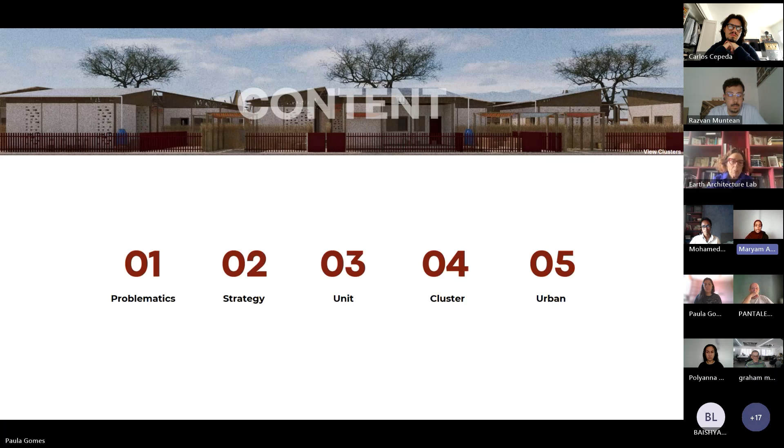We did some studies on IDPs in general. Today, one of the issues that's very prominent in any shelter strategy is isolation, density, vulnerability, as well as uniformity. This is a root cause that's existing within the world. And if we look at the numbers, Somalia falls in one of the countries with the top IDP numbers, showing it's a huge national crisis.

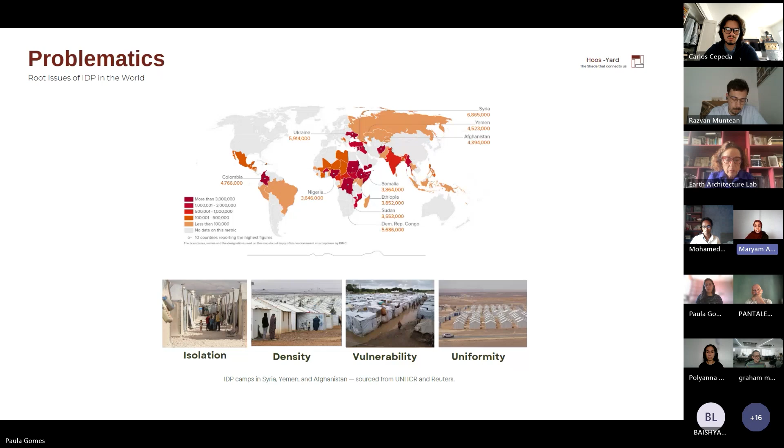So looking at that problem in general, we wanted to see how we can propose a solution that would address the architecture at large, as well as Somalia specifically. Yes, this is the context of Somalia.

If we look at the studies and materials gathered based on our scenarios, we have 3 different scenarios, 3 cities. One of the major problems was that the Somali IDPs are very independent. They do not integrate with their host cities, so the relationship is a little bit compromised. That's one area to look at.

Secondly, they're at a fragile state. These people had lives going on, but then disruption happened and everything stopped. The third part is lack of integration. They don't integrate easily, and that is because they think about when will they go back to their homes.

So one of the ways to tackle this would be, how can we make this area or this transitional phase somehow their home? And finally, the IDPs in Somali communities are mainly women and children. That tells us exactly the user we're dealing with—they're very fragile and they are on a building stage.

So if we look, these are pictures and references from the shelter cluster that was provided and exists. The disconnection is very prominent—they do not belong in any city. So they act as their own microcosm, their own neighborhood, and that draws a proper line between these IDP communities and the cities.

And of course, we have one major issue, which is instability. Any minute, they can be evicted because of land acquisitions and other problems. And finally, one problem that seriously exists is fear, especially for women, if they're about to use toilets, and just generally the environment is not the safest.

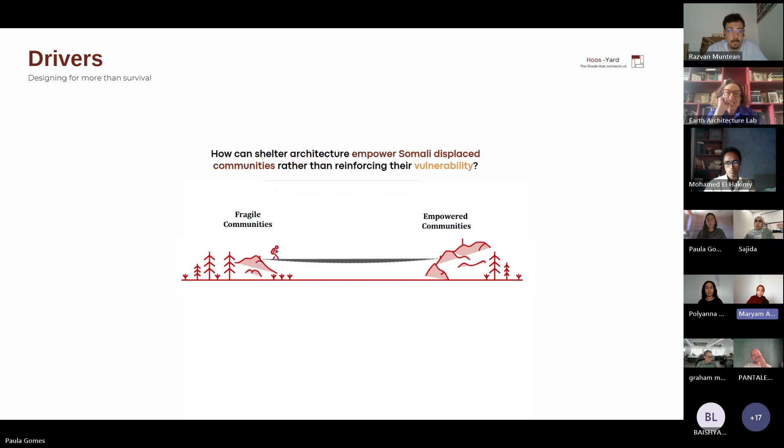One of the ways we can easily do that is establishing the core Somali values. If we look at any Somali value, any Somali society, there are very prominent values that exist within all the Somalis, whether they're based in Somalia or in the diaspora. One of those values is community—they're very social.

Secondly is identity—they really hold and respect their culture and traditions wherever they are. And thirdly, it's resilience. They do not hold back and they don't stop; they always find ways to keep it moving.

Every core value has been highlighted within the IDP camps. For example, we see reference of communities gathering under a tree in one of the IDP sites. And another one is identity—this is actually a wedding hall within the IDP camps.

And these are Somali patterns and Somali traditional clothing fabric. And finally is the resilience, where they are very much economically spirited, so they know how to start their shop fronts and build from the ground.

So when we started approaching the design, we wanted to see how we can bring beauty into these everyday spaces, because we're designing a home, a shelter. One of the elements that exist within any Somali neighborhood, Somali street, or Somali household is, number one, a very strong identity, strong use of colors, traditional patterns, motifs, paintings and pottery. So we wanted to see how we can extend the normal neighborhoods within Somalia to the shelters or the IDP camps. That started with identifying the spaces, starting with identity in space. How can we take it with us?

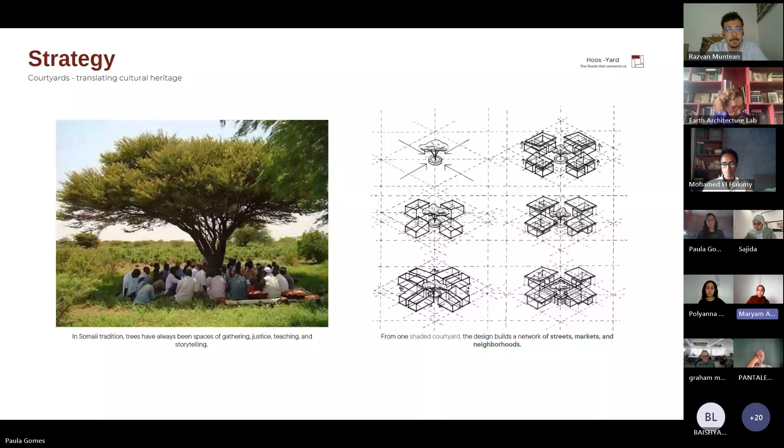If we look at our IDP housing strategy, it's about how we can create a settlement that starts from unity and then moves into a sustainable cluster and integrates seamlessly with the city. One way we did that was by creating a neighborhood with 4 families each and a central courtyard that builds trust, which they would need to function properly and get back on their feet. That allows us to have a sustainable cluster with fully integrated smart solution systems. And then from one micro unit, we extend into an entire micro neighborhood that easily could fit in with the existing host city.

Yes, so the courtyard isn't just used as a courtyard area, it has multi-purpose functions. First of all, it's a cultural space where things are happening, mothers and women are cooking, children are playing. It's a safe space for them, as well as acting as a climate buffer. We're dealing with harsh climate, different cities, for example Bosaso which requires a lot of heat, we have Doolow, we have Baidoa. So this also acts as a thermal strategy.

And finally, it's an economic enabler. There's a cultural Somali system based on group funding, called Ayuuto. So the more people know each other, the easier that can happen. It happens already in the IDPs, facilitated by NGOs, but this will allow them to integrate within their neighborhood, build trust in a way that they can start supporting each other, and create micro proper climate and micro economic areas that could finally bring them back to their feet.

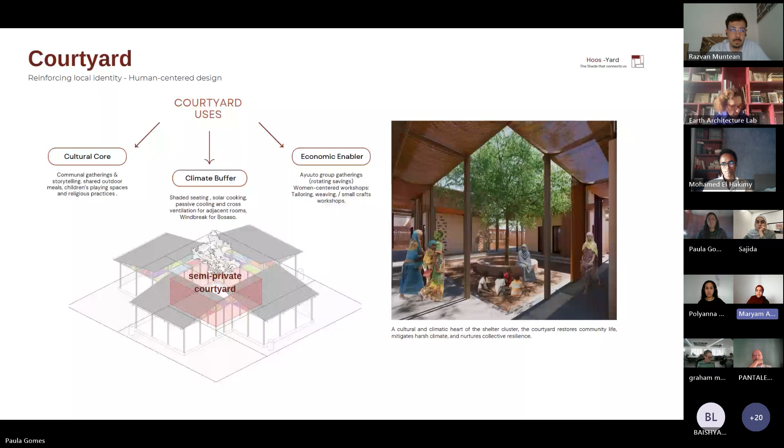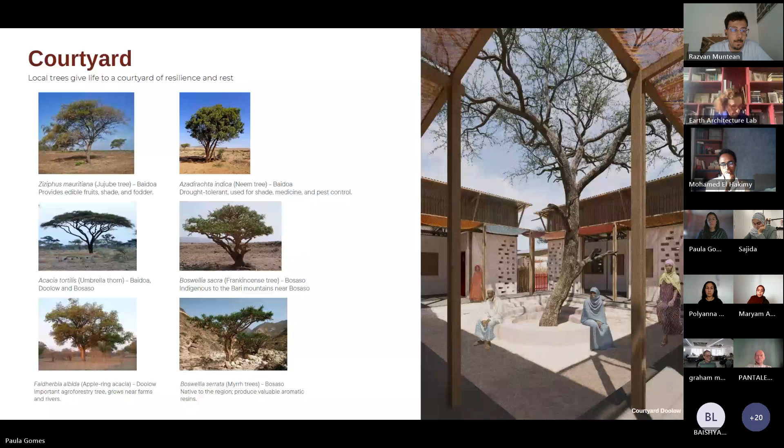Okay, so we begin the implementation of our concept with a general approach across all sites. All plots will share the same geometry and an approximate area of 110 square meters. Their placement is designed to allow the formation of the semi-private inner courtyard that my colleague talked about.

The core structure of the shelter will be a timber frame set on stone foundation with a single pitched roof of CGI sheets. This structural module will be replicated identically across all plots in all three sites, serving as our proposal solution for the emergency phase of the project. In this initial stage, residents will be able to install lightweight partitions, such as fabrics or CGI sheets, between these pillars to form their basic shelter.

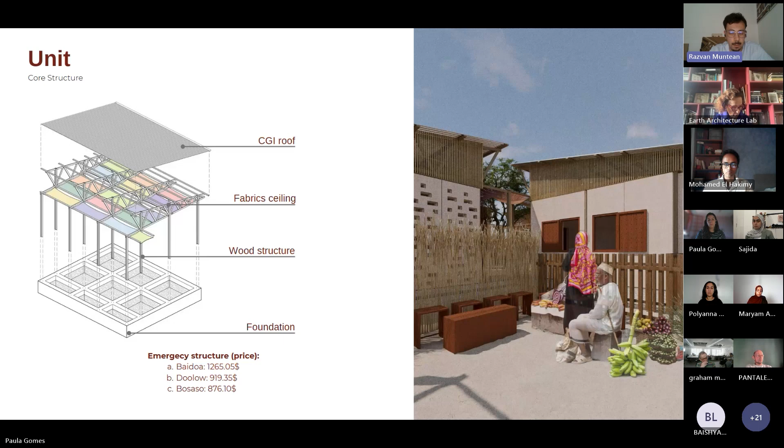We aim to give families the freedom to decide how they will use their plot and how they configure their living spaces. Our proposal offers a variety of wall types and a shading veranda system.

The walls are made of different materials depending on the site and are categorized into four types: solid wall, ventilation wall, window wall, and door wall.

Each family, within the allocated budget of their unit, will be able to obtain approximately 10 to 14 wall panels and 3 to 6 verandas. We need two walls every time to infill a space between two pillars, so each wall has a width of 1.20 meters.

This approach ensures that the main shelter structure remains robust, consistent, and professionally built, while the infill walls are left to the discretion of the residents, integrated with the help of YOM. This strategy introduces architectural diversity and allows each plot to gain its own identity and character.

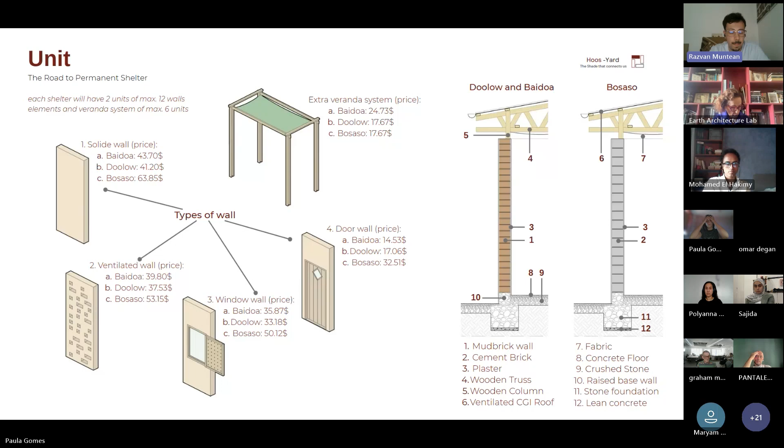As previously mentioned, the rigid timber structure represents the emergency phase of the project. Once the wall panels are added, we transition to the permanent phase. In the future, we also anticipate possible extensions, which will be presented later.

Below, we showcase our proposed wall layout options. All configurations include two rooms and a total interior area of around 21 square meters. Each family can choose its favorite layout. On the right-hand side rendering, we see an example of a permanent shelter built in Bosaso.

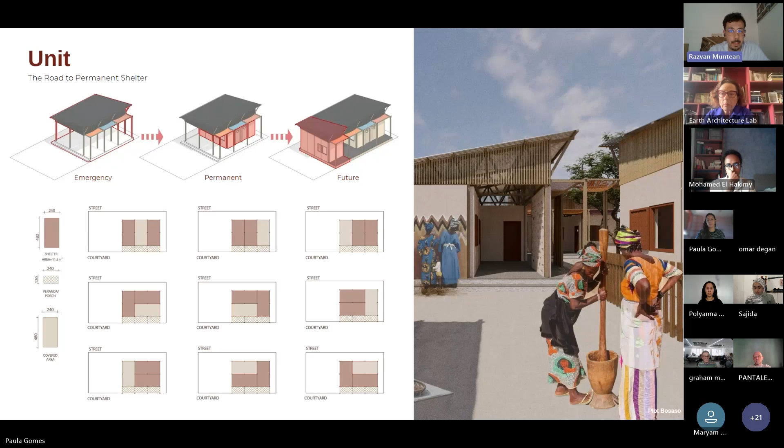In order to ensure sustainable design, we began by analyzing the natural environment in which the project is located, and we looked for solutions specific to on-site conditions. In addition to rainwater harvesting from the roof, we also propose a system of harvesting water from atmospheric humidity. This strategy was identified as particularly relevant in Bosaso, where rainwater is almost entirely absent throughout the year.

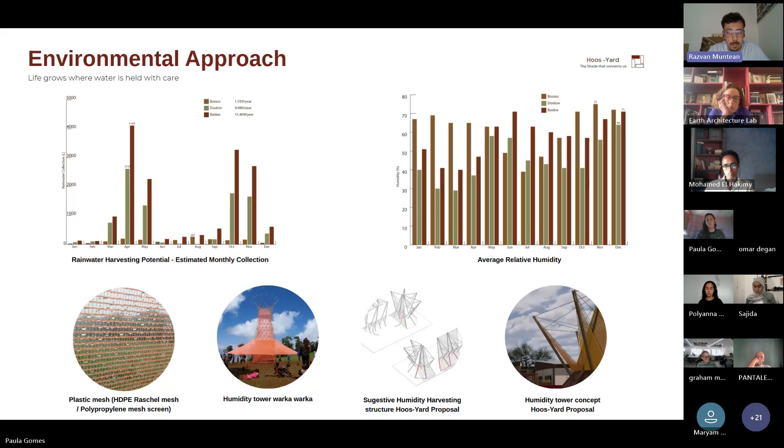Humidity harvesting systems are commonly used in coastal regions, and several studies confirm their effectiveness in arid climates. Also in Yemen, we have such systems, and we recommend that future feasibility studies can be conducted to evaluate and implement such systems at scale.

Our proposal is self-sufficient, designed to support an economically sustainable lifestyle. The large roof surface we propose significantly increases the amount of rainwater that can be harvested throughout the year. For example, in Doolow, a single shelter can collect up to 15,000 liters of water annually. The roof also enhances natural ventilation inside the dwelling and partially protects the walls from sun.

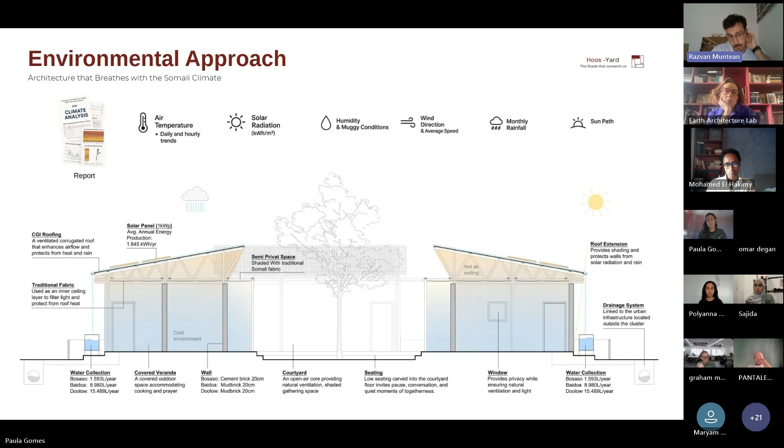Beneath the wooden trusses, we hang fabrics for thermal comfort. By elevating the roof highest at the center, we create shade areas in this semi-private interior yard. Each cluster includes a tree, which contributes to air quality and thermal comfort. Moreover, the urban layout allows future integration of shelters into public water and sanitation systems, ensuring long-term adaptability and resilience.

Like we mentioned before, we are creating a cluster system of at least 4 shelters centered around a courtyard and a tree, as Hasban mentioned. The idea of creating this cluster system is also to foster a sense of community between families that might never have lived close to each other or even know each other. This spreads from the smallest scale, the shelter, into the urban scale, as we're going to see next. As families move to these sites, not necessarily from an existing community, we can create this community within each site.

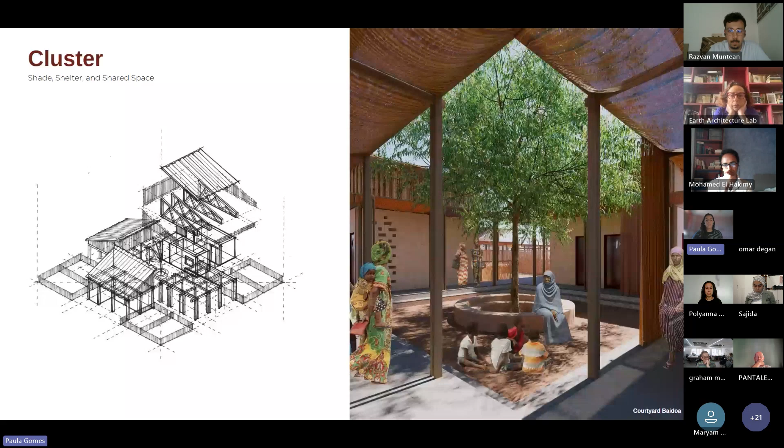Moving to Baidoa, we have seen that each city has a different scenario for how families are living and their livelihood activities. Baidoa is a farming and livestock community.

Is missing something here, sorry.

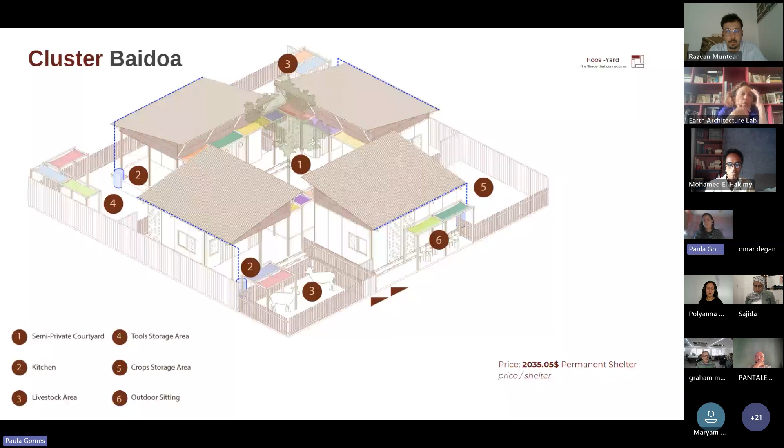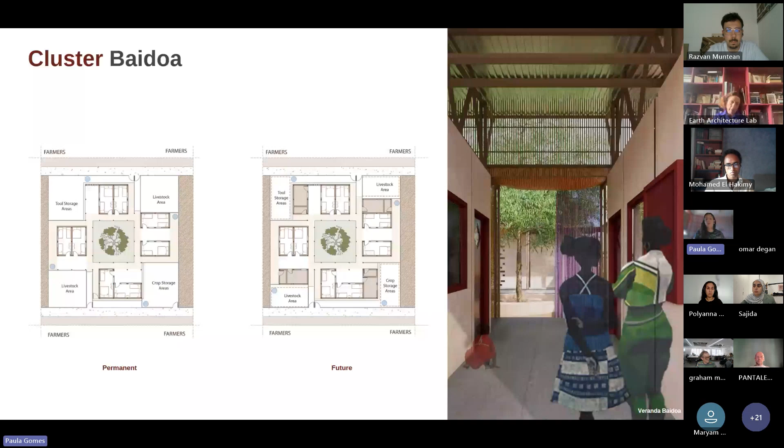Baidoa is mostly a rural site composed of pastoralist communities, so at the cluster scale we focus on having outdoor empty areas for each family to raise their livestock, be it sheep, goats, or a crop storage area. As mentioned before, we have a permanent shelter composed of two shelters plus one veranda, which in the future can be expanded by adding a new unit where a toilet can also be located. But we're still keeping these areas outdoors for livestock, workshops, or anything that fits into their livelihood activities.

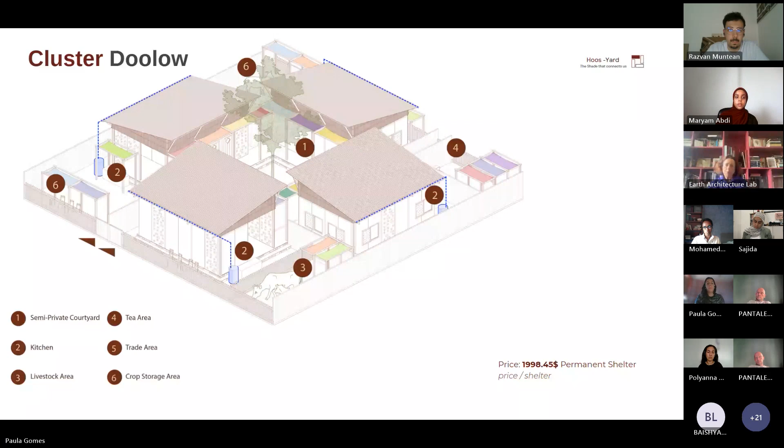For Doolow, we have a mostly farming community. They need spaces to do their livelihood activities, so we are thinking of having small yards within the cluster, but also giving them bigger livelihood areas at the urban scale. The same applies to the plans: we have crop storage areas, tea shops, and trade areas, since these farming communities would also have produce they might want to sell to neighbors who produce something different. And again, we imagine a future expansion to have another shelter unit with toilets included.

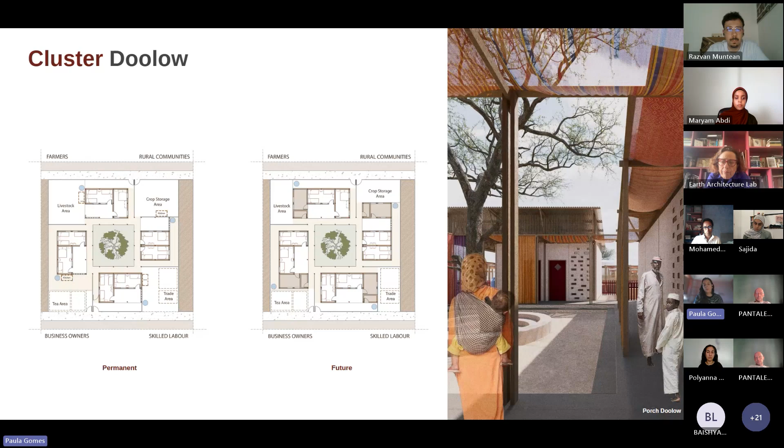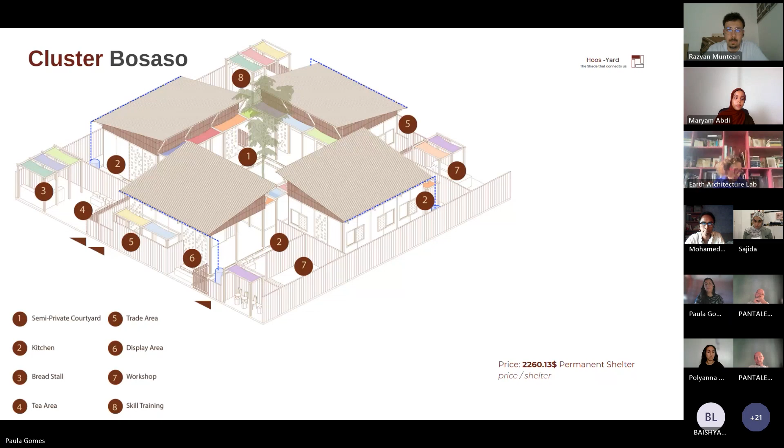Bosaso is the most different in terms of community and livelihood activities. The area has the harshest climate, so they're not very prone to farming or livestock; they mostly work with markets, shops, and informal trade. So we tried to create shaded spaces with our veranda system where in the future they could have shops, tea shops, coffee shops, and bread stalls — things that create a sense of community while giving them a livelihood and power to run their shops within their own cluster and plot. These plots are usually occupied through trades, workshops, and skill training areas where they can work with neighbors and build community.

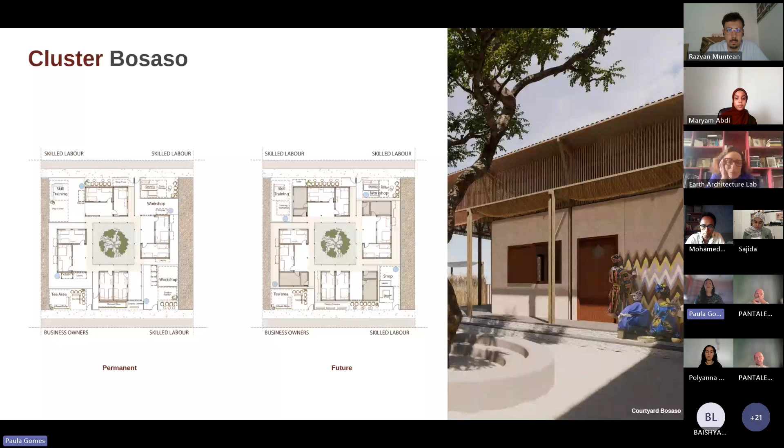An extension area is still included in every plot for the future. Within the cluster system, we've identified the potential of creating a toilet area with separated women's and men's sections. As mentioned before, to reduce the fear women feel using latrines in existing IDP sites, we try to create a more lively space by having these toilets always facing local or main streets, with clear gender separation. In the future, we see the potential for the toilets to move into the plot itself, so this area could be further developed into a new public space. We plan to use the same type of structure for these toilet units as for the shelters, so they're easy to build but kept separate from the existing shelters within the cluster.

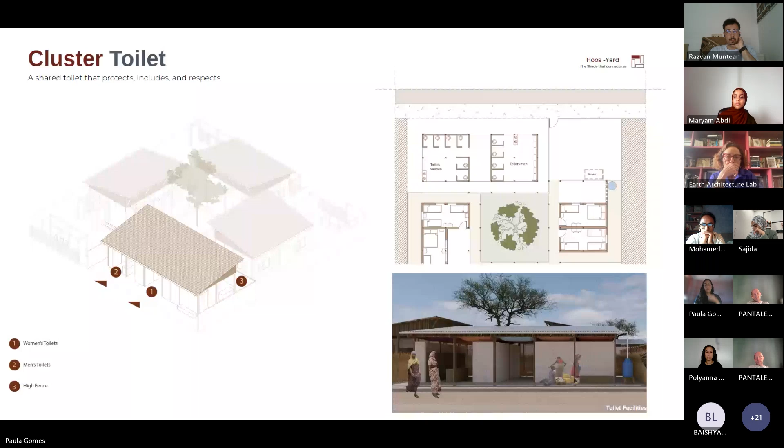Looking to the future and how we can grow urbanly, our cluster system moves easily from the urban scale. We've identified the potential for our system to be adaptable to different IDP scenarios, not only in Somalia but elsewhere, because it allows for easy growth and expansion and can be adapted to different morphological sites.

So looking more at the urban scale and approach, we've established some ground rules for how we develop each site. First, we have an urban infrastructure with bigger main roads at least 6 meters wide and local roads at least 3 meters wide, to allow cars and emergency vehicles to move through the site and to create evacuation routes for the entire site.

We created different sizes of clusters, not necessarily only a 4-plot cluster. We can have 6, 8 clusters or different shapes of courtyards depending on the needs of the communities and how the presented site is. We have one toilet cluster placed no more than 15 meters away from every plot.

And we created public areas and public facilities within every site given, every scenario, because we've identified that some have lacking public facilities around, or we've also identified livelihood activities that need bigger areas to exist, or how they also gather to the community and foster the sense of community at different scales.

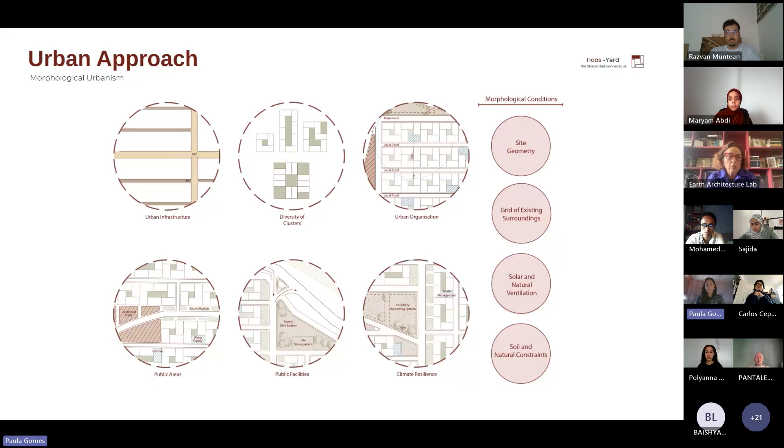So now we're going to look specifically through each site, starting with Baidoa, a pastoralist community of about 140 households. Following our clusters, we are getting to 140 plots within the site, having the water facilities, the courtyards placed, the common spaces.

So Baidoa is an area where there are more public spaces and facilities around, like a mosque, a school. They already have a borehole in the area.

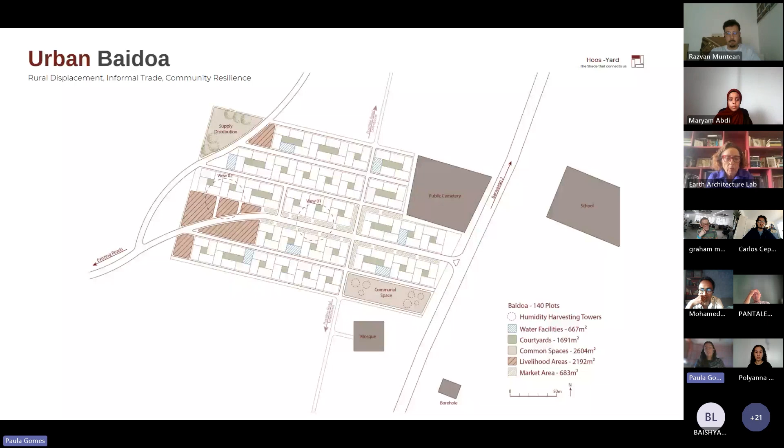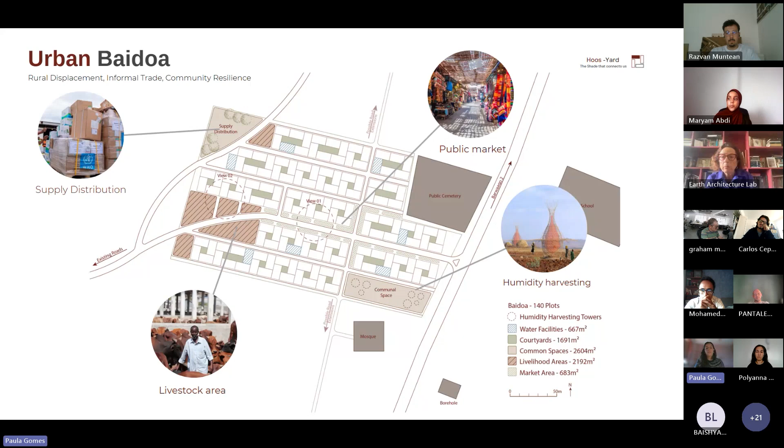So in the case of Baidoa, the livelihood areas are mainly focused on livestock, and also having the humidity harvesting and the common areas. So here we have 2 images of how we imagine these common areas could be explored.

On the left, we have the street markets, kind of like the souks, which is one of our references, and where the women and the families around can create these shop areas and the livelihood areas as well on the right.

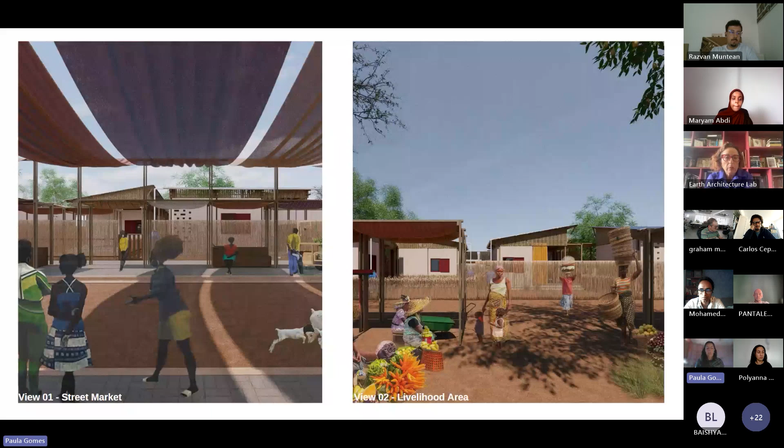And now we have Doolow, which has a unique characteristic, like Maria mentioned before, because tenancy of the plots is not that long. So the 2 plots down on the left have a shorter tenancy.

So for that, we try to place most of the plots on the right-hand side. We have about 165 plots in that area, and on the lower one on the left, we have 42 plots, which totals to 207 plots, 7 more than what is asked in the scenario.

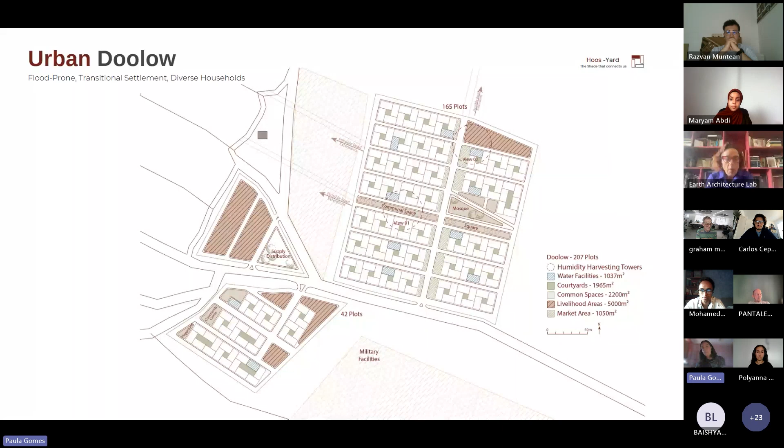We also have the communal spaces and the livelihood areas around it. And we try to place especially the farming area on the left in the plot that has a shorter tenancy.

This area doesn't have a mosque around, so we placed one around our site. And we try to implement these public facilities and activities to also foster the sense of community.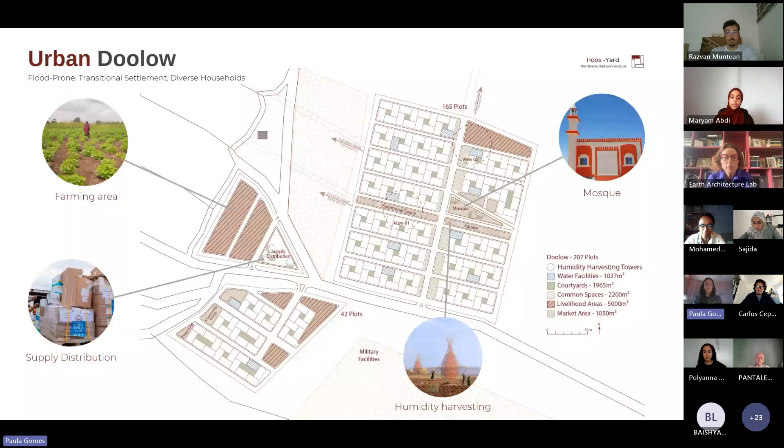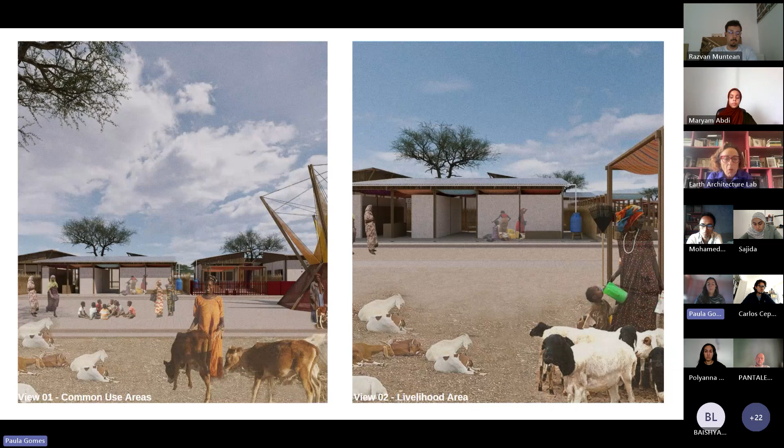And lastly, we have Bosaso. Bosaso is a city with the harshest climate, with really strong winds. So we try to place on the areas around the plot, especially on the sides, these public activities that could create a barrier for the shelters and households from this harsh climate.

So also this one is a city that doesn't have much livelihood around farming, so we have the strongest market area, and Bosaso is also in the expansion area of the city, so there are not many public facilities around.

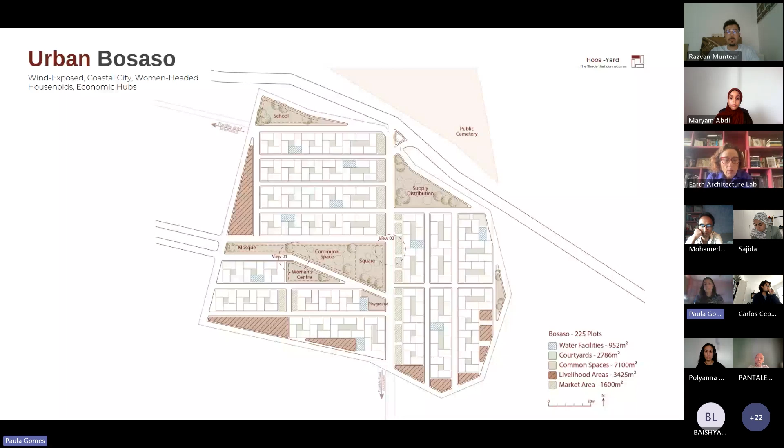So we've included a mosque, communal space, women's center, school, all these ideas that could be implemented on the site. And we are also meeting the requirement of the 225 plots.

Like I mentioned, the supply distribution. We also try to keep the supply distribution area always close to the entrance of the site, so it will be easy for them to bring maintenance and anything that the site might need.

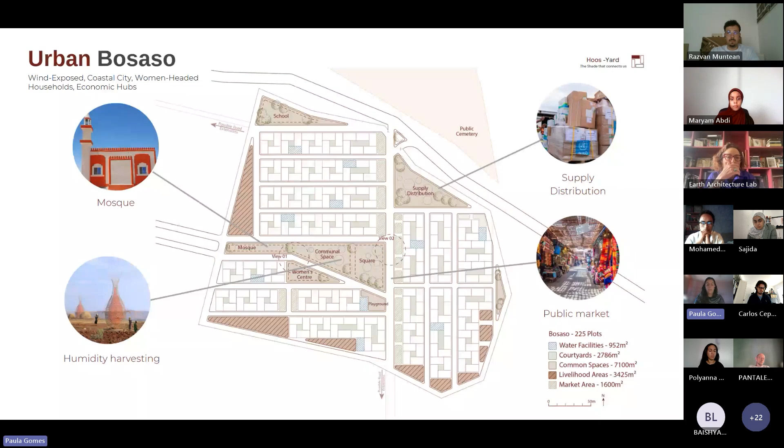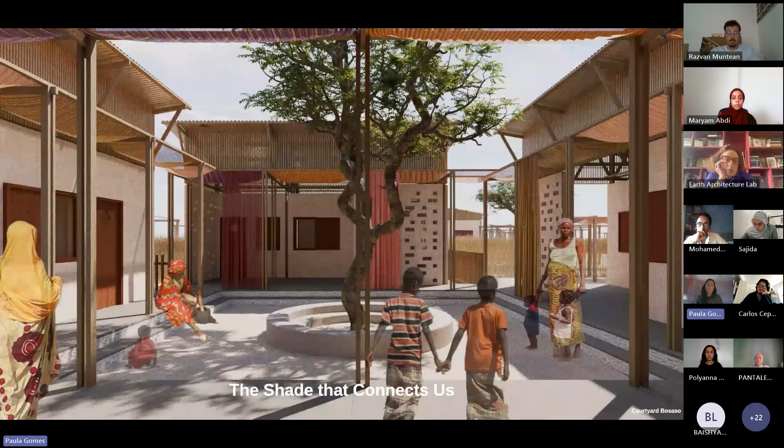So in total, we try to create a system that allows the IDP families to create a sense of community through every scale, be it the shelter scale, the cluster scale, and the urban scale, uniting and connecting them through this idea of a shared courtyard and a shared space.